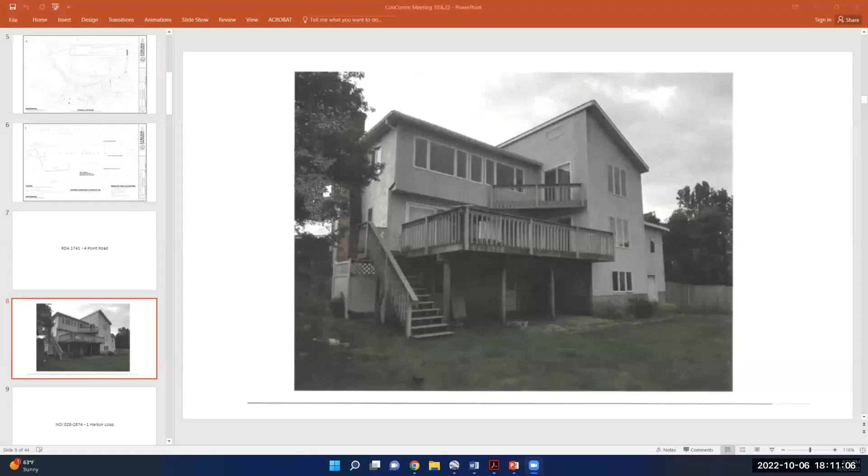There was an existing deck and we removed the railings and the decking, including the treads and the handrail, and replaced them all with maintenance-free Trex and Radiance rail system.

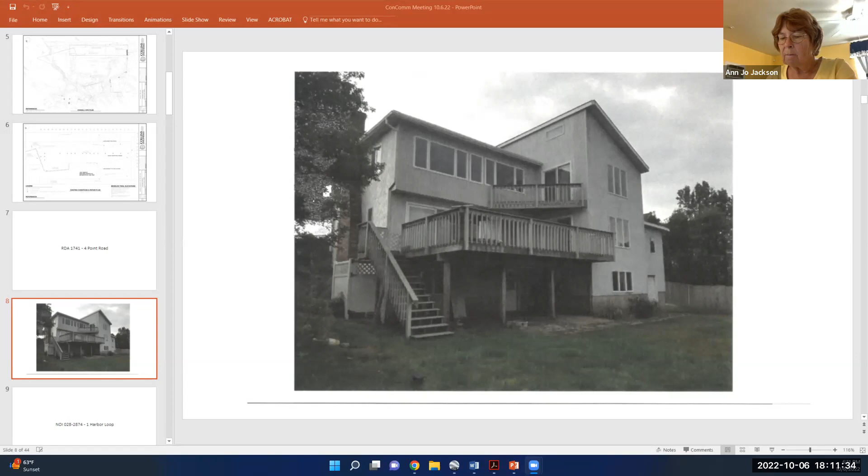Okay, and the resource area is what here? It's buffer zone and LSCSF. Okay, is this an after the fact application? It is. Okay, all right.

Chuck, have you been out to the site? I have not. I did not realize it was an after the fact application.

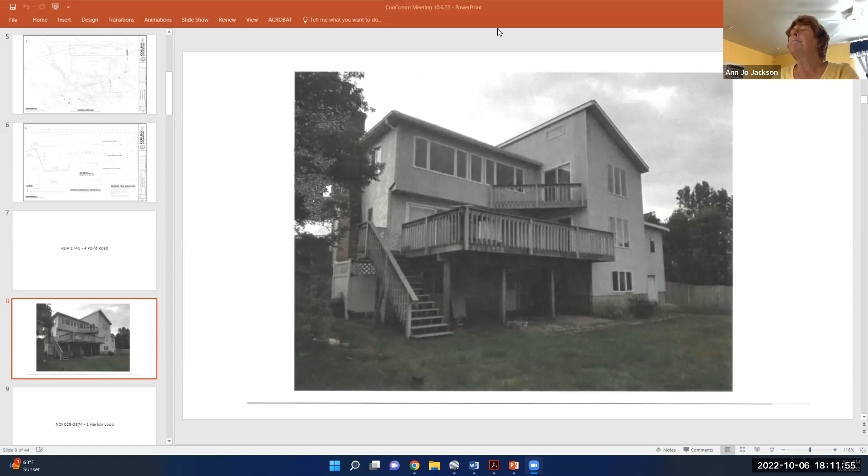Okay, all right, I'm going to open this up for public comment. Is there anyone in the public who wishes to comment on RDA 1741 at 4 Point Road? We have 17 attendees and I do not see any hands up. Okay, we'll close the public comment period.

Honestly, I would be more comfortable with this if somebody saw it, since it's after the fact. I think that'd be best if we did a postponement on this particular one. Yeah, well, don't we still have to do a

Commissioner comment, certificate of completion? Do we still have to do a certificate of completion on an RDA? No, we just have to find that it is or is not impacting the resource areas.

And the big question is, did anything expand in doing this? No, in fact the deck got a little bit smaller. And then we removed an upper deck, so it's non-existent now.

Is the deck pervious? Does it have space between the boards? Yes, just spacing. What we have there is spacing, but we have a gutter system incorporated underneath the deck that leads down into a dry well. That dry well was existing under the stair.

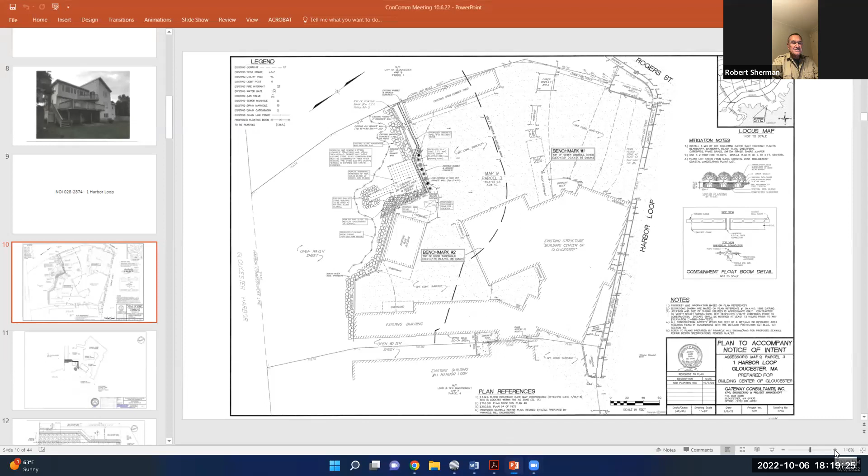My name is Michael Faherty. I live at 45 Rocky Neck Avenue. I'm an attorney, and in this instance substituting for John, representing my client, the Building Center.

In response to a suggestion made at a site visit attended by Mr. Gradwell, Mr. Sargent, and Mr. Shade, we've added some plantings along the inside section of the proposed wall, in an effort to do a bit more with the drainage, which we contend will be very insignificant because of the levelness of the project, but this will be an additional buffer and treatment of any runoff from the site.

I emphasize that the site is 8 feet above sea level up in the middle of the parking area, and then all the way down to the wall it's at 6 feet. So it's only a 2-foot change in elevation across the parking area and the area where the equipment and materials sold at the building center are stored.

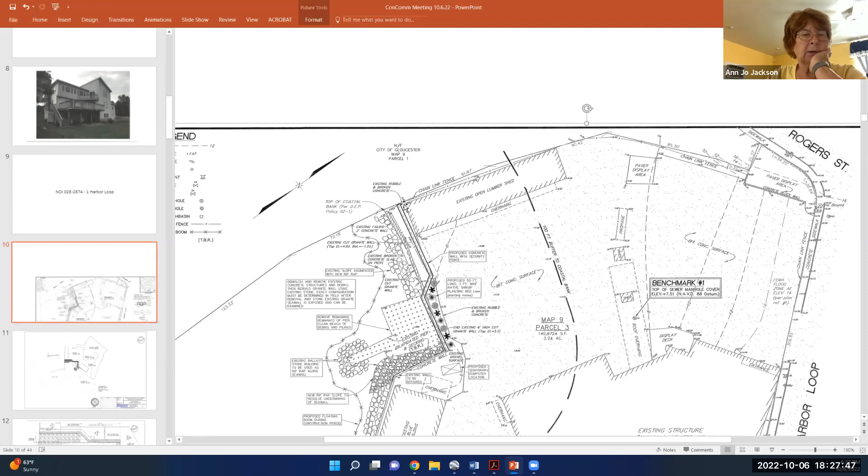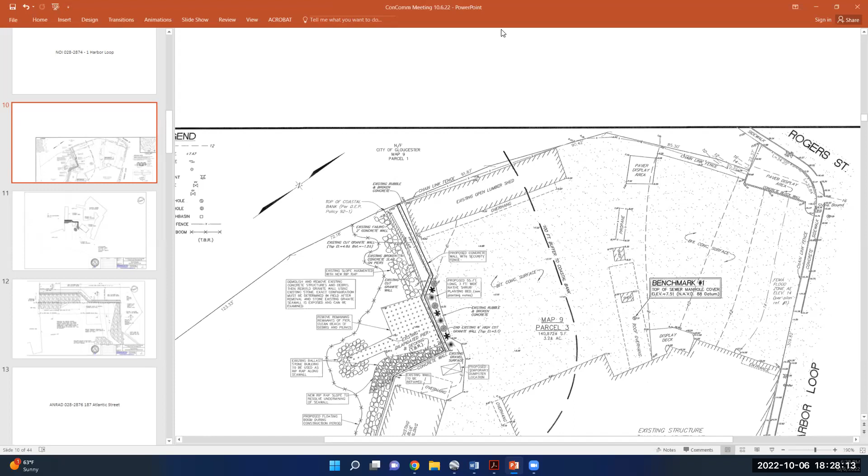There's a fence between the properties also, and the new wall would end at the fence. Okay, I have no further comments.

Chuck, do you have anything to add to your comments? And thank you for them. No, I mean, I guess it's replacing a previous wall, so that part seems to be nothing that causes concern. I guess it's just the additional height on that wall. There's concerns about how it might change things during a storm flow, but...

That would be the only question there - maybe that portion of the wall is not extended all the way to the end. But otherwise, I think the overall project is actually a net benefit for what's going on in that area, with the removal of the piles and cleaning up that rock. I think that'll help protect the bank there that's obviously eroded.

Okay, thank you. If there are no further questions, I think we're ready to close the public hearing. Barry Gradwell would like to close the public hearing on NOI 0282874, One Harbor Loop, Building Center of Gloucester.

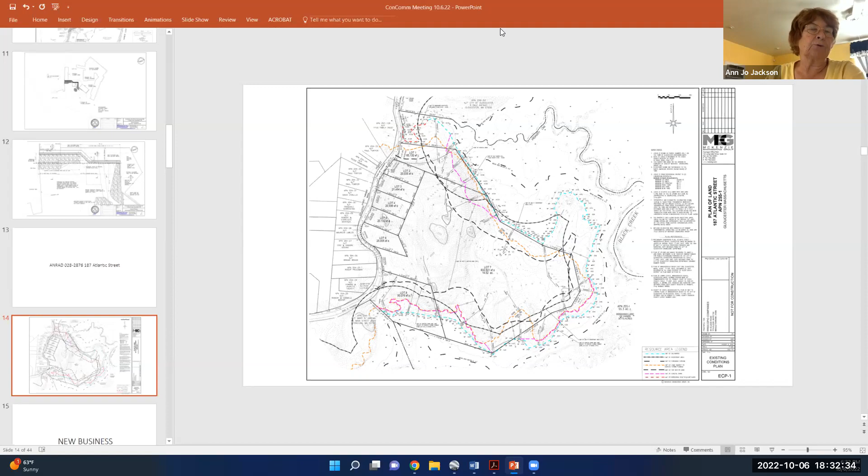Is there anybody in the audience who wishes to comment on the project at 187 Atlantic Street? We currently have 17 attendees. We've got a couple hands popping up. Robert Bishop is first here. Hi, my name is Robert Bishop.

I'm at 176 Atlantic Street in Gloucester. I just have a couple quick questions. On the map with the different dotted colored lines, where does that data actually come from? How did the applicant distinguish that? And then also, I would like to suggest to the committee and the applicant Procopio to maybe go out in this lovely, beautiful area at full moon, high tide, because that water comes in really high.

I'm across the street by about 500 feet, and the last harvest moon we had, I had beautiful waterfront property. So I just want to put that into consideration as well with the water concerns in the clam flats in this whole area. We've already approved the lot across the street, and I just want to make sure, moving forward, we protect everything around us, guys. Thank you very much. Certainly, thank you very much.

Do we have anyone else to comment prior to Ms. Rimmer answering the questions? Yes, I have John Myers here.

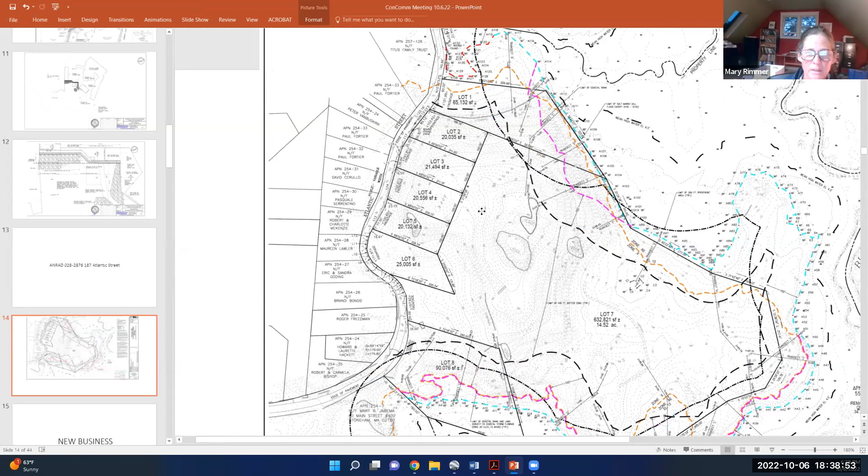Others are delineated by engineering and survey calculations, which would be the coastal bank line, reviewed by myself and the project engineer, Mackenzie Engineering. Hopefully that answers the question. We provide the materials in digital format to the Conservation Commission. I'm not sure about AutoCAD format, I'd have to check with the engineer. That's not typical, that the AutoCAD files are provided to the public.

This is not a required procedure. This is a voluntary procedure to go through this step to help guide the planning process, so that we're all in agreement with where the resource boundaries are for any future development.

Thank you very much. Well spoken.

Okay, let's open this up to commissioner comments. Member Cook, no comments. Member Gradwell, no comment. Member Sargent, no comment. Member Sherman, no comments. Member Jackson, no comments. Do you have any additional input on this, Chuck? You've been out to the site.

No, I walked the entire perimeter with Mary, and it was pretty straightforward in the majority of the property there. Very distinct vegetation changes along that stone wall that went along the entire perimeter, right at that salt marsh line. So I'm very comfortable with what I saw out there.

Okay, and we now have a DEP number, so we can act. Barry, if you would like to close the public hearing. Gradwell would like to close the public hearing on ANRAD 028-2878, 187 Atlantic Street. Commissioner Cook seconds.

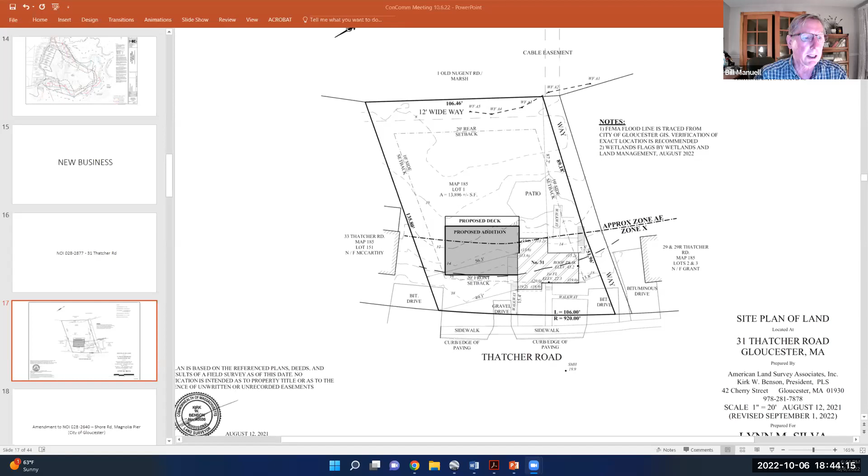And what I'm seeing here, Chuck, is this is not the plan I was expecting. I wonder if I gave you the incorrect plan to show. Let me see what else I have in the folder here. I could share, if you don't have the correct plan, I can share my screen and show you. Yeah, that's the only plan I have here. But what I might have done is incorrectly sent you electronically an earlier version of the plan, but the plans you have on file are the correct plans.

Okay, so if you'd like me to share my screen. Yep. There you go. Should be able to do it now.

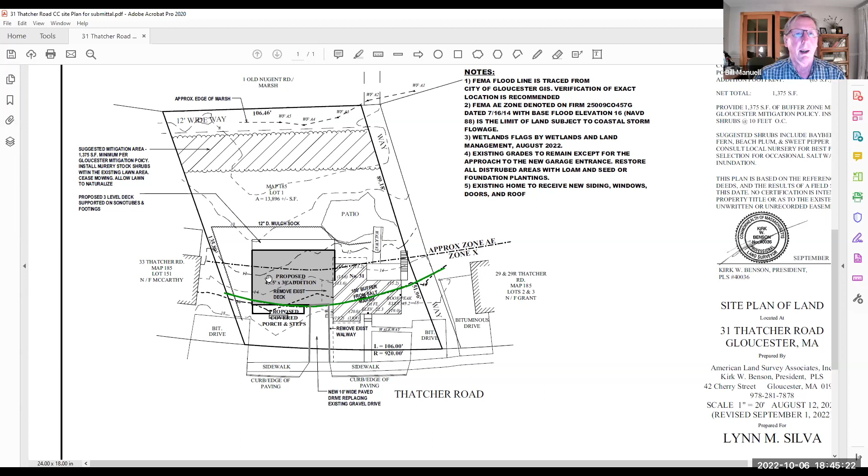All right, these are the paper plans that you have in your file. And so this shows the addition here and shows the area of mitigation right along the back. This is 1,375 square feet minimum. We have a chart of impervious coverage over here and our net total of impervious, and I have suggested shrubs and spacing for the mitigation area.

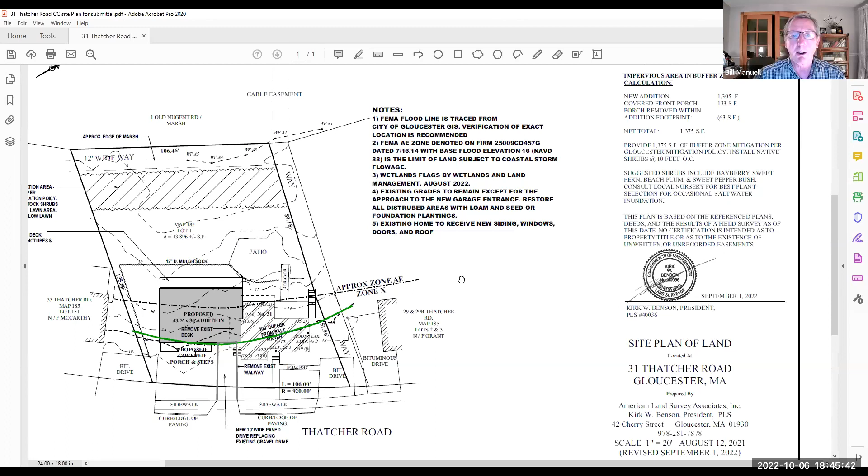And this is all consistent with your mitigation policy. We do show a mulch sock erosion control barrier to hem in the work. It's a fairly tight work site. It'll have a one-level deck on the back. It's a pervious feature, there'd be no roof on the deck, and no tree removals or anything like that. Everything, as I said, occurs within the existing grass area.

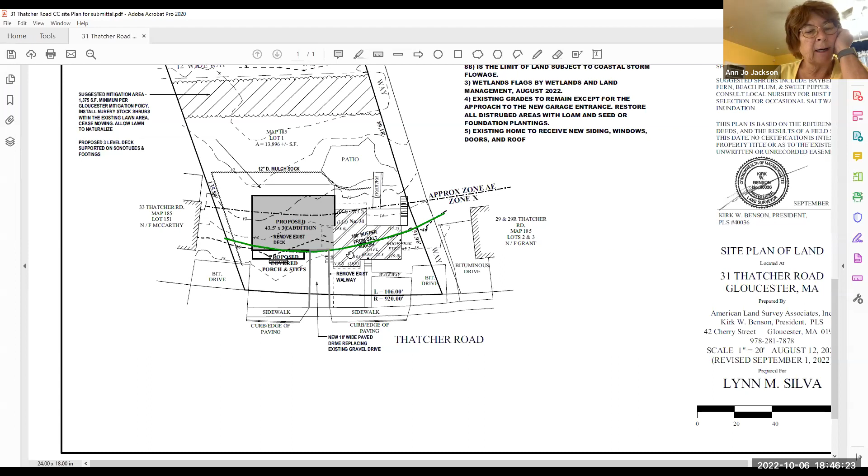Okay, thank you. Let's open this up for public comment. Is there anybody in the audience who wishes to comment on the project at 31 Thatcher Road? We have 13 attendees and I do not see any hands up at the moment. Okay, we'll close the public comment period.

Commissioner comments? Member Cook? Okay, is this on pilings? No, this will have a foundation with flood vent openings.

Okay, I think because we're starting to deal with the new regulations in regards to multifamily construction, this is a proposal that's more than the size of the existing house. So basically, we're building a new house attached to the old one. And I think in this case, it needs to be on pilings.

Member Gradwell? It's okay, that's right. It is an awfully large addition, but we have no restrictions on that. No further comment. Member Sargent?

I would have preferred a 2-to-1 mitigation for the increase in impervious surfaces. And I also note that it would have been easy to decrease the added impervious surfaces by not paving the driveways. And there should be a minimum of 2 years monitoring of the mortality of the mitigation plantings.

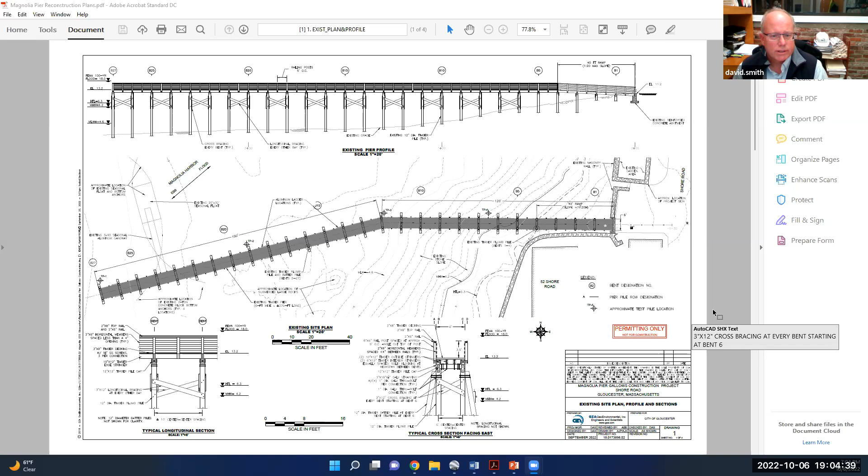So the proposed project here for this amendment would be to add a gallows frame—basically a frame that's two vertical plumb piles with a heavy duty beam that connects the tops of those piles.

And then we would have two batter piles on each side that would add some rigidity to this frame, both in the X and Y direction.

So there'd be 6 piles total installed, offset midway out from that pier. The gangway that we purchased as part of the pier reconstruction work is going to get repaired and reused. That's a 40-foot gangway, so we're going to install it about 20 feet offset from the pier.

The timber float that was on site had been there since 2016. It was never constructed properly for the particular site. It was a large float, 20 by 30. The harbor master suggested reducing that size, so we're going to go with a 12 by 24 foot float.

At the site it'll be a timber float. In addition to this gallows frame, we're going to improve the connections that the gangway has to the float, and replace the mooring chains that are currently out there. The moorings will stay in place and be adjusted properly along with that gangway-to-float connection.

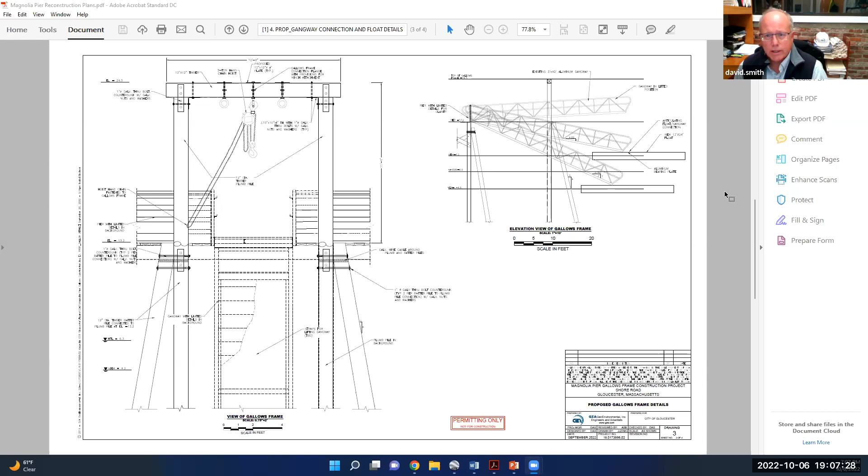So that's the project in a nutshell. Okay, thank you very much.

I'm going to open this up for public comment. Is there anyone in the audience who wishes to comment on the project at Magnolia Pier?

I don't know, do we do public comment on extensions? It's an amendment. Okay, sorry, I'm used to amendments appearing elsewhere on the agenda. Okay, we're all still learning.

There are 12 attendees and no hands up. Okay, so it's a moot point. We'll close the public comment period.

Okay, next up, commissioner comments. Member Cook, no comments. It looks like we may have a late public comment.

Somebody just put their hand up. Should we? Yeah, why not. I've started it, go ahead. Got Doug Rennie.

Thank you. Sorry, I couldn't be there other than on Zoom tonight. I'm actually an abutter, and I was trying to get online to see what this design was last night, but I couldn't find it anywhere. I looked pretty thoroughly. My name is Doug Rennie, and I'm at 52 Shore Road. I'm adjacent to the dock.

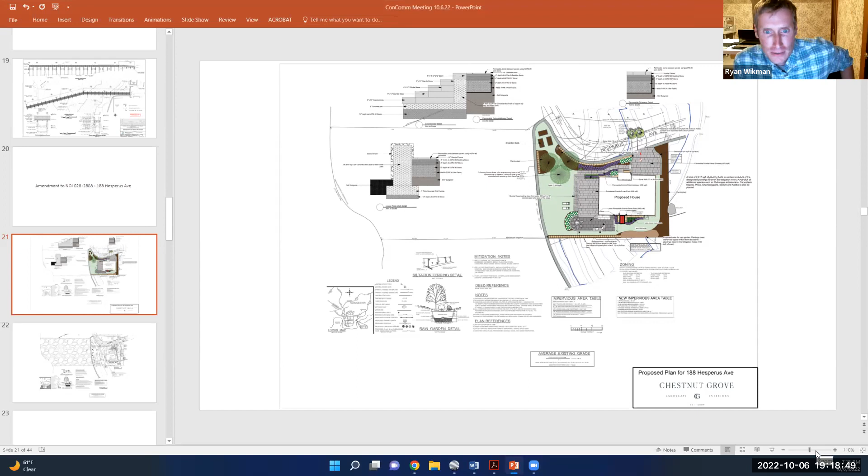Okay, let's have a summary of the plan. Yes, so we are proposing, this is a brand new build. Construction is already underway for the house, as you can see in this plan, for the proposed house there. We have developed a landscape plan for the project, and what we are proposing here is installing, I'll start on the top right.

We're proposing to install a pervious granite driveway, so it is a fully permeable driveway. I have details as well shown at the top side of the plan, showing what the pervious or permeable driveway would look like.

We also have, leading from there, walkways that lead to the front door and to the side of the house. Those walkways will also be a permeable surface. They are granite pavers, yet the joints are all permeable, so water is allowed to percolate directly through the joints. We create, as shown in the detail, three different layers of a gravel base, which allows us to drop the water directly down beneath those walkways instead of having the water run off.

So it is a 6-inch depth, and at the right side of that, there is an 8-inch wide by 24-inch tall concrete block wall, which the top step will sit on. But what it also does is help retain that patio, which is now between the proposed house and the stairs, keeping it in space.

But again, that whole patio is going to be a permeable surface where all the joints allow water to percolate directly down underneath, into the existing soil beneath. As we work further down, two more stairs lead us down to a lower patio space, again a permeable surface, as the details show throughout the drawing.

We do have proposed a 42-inch fire pit, a propane fire pit, on the left side of that lower patio. There's also a grilling station with a propane gas grill, a pizza oven, and a Kamado charcoal unit contained within that grilling station. Again, all of the hardscape surfaces we are proposing are permeable surfaces for what I've gone over so far.

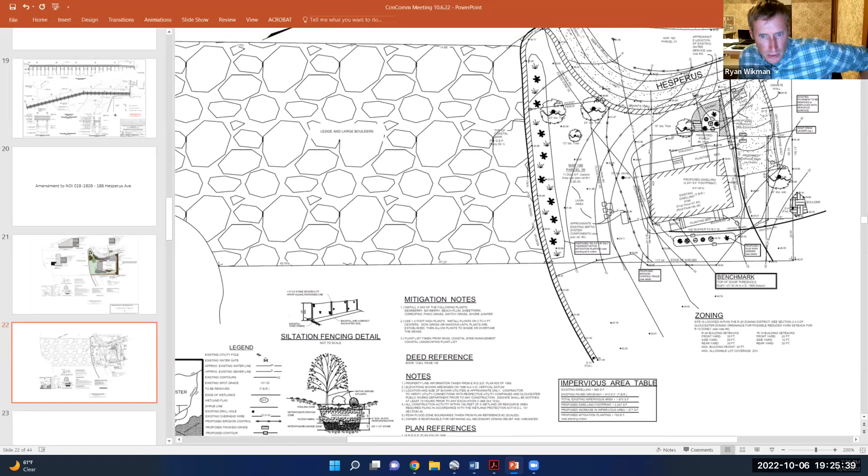What we're taking from the existing conditions plan and what the builder of the home had previously presented to the town - that plan called out the mitigation notes we see here. In the mitigation notes there's a whole plant list of plantings we're planning on using throughout the entire landscape. Our goal with the client was to make this property and its plantings go along with the beachside landscape. We're going to be using pretty much all of the plantings within the mitigation notes, and there are two pieces to that.

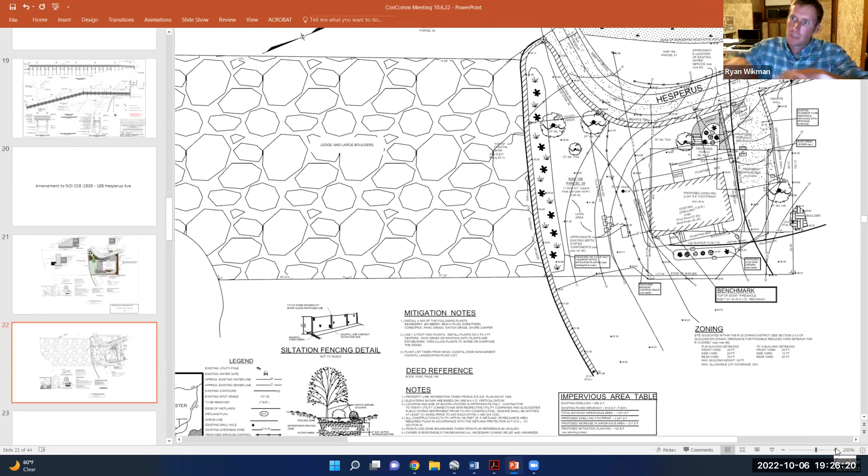There's a mitigation planting which in this plan shows right on the front side of the property, on the back side of the seawall - that's proposed at 750 square feet, I believe. And then on the bottom side, the rain garden that Chuck is showing is around 150 square feet. That also has mitigation plantings within it, but the rain garden is a bit of a depression there. Now if we go back to the other plan, what we're proposing gives much more planting space within the proposed landscape plan.

I'll start with the rain garden. I'm proposing to put that in slightly lower, in that light brown section. So putting the rain garden in that area creates a depression and allows water to percolate directly down. We have plantings that lead from there all the way to the seawall, and plantings that lead to the back corner and then all the way back up to Hesperus Ave as well.

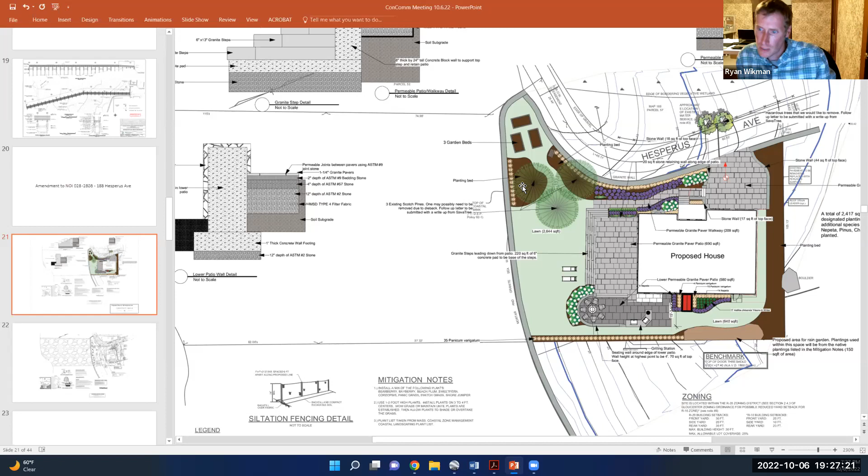There are a few other planting beds throughout the property, and what we're aiming to do is take the list of mitigation plantings and mix that all throughout our planting beds. What I'm showing you now is along the bottom side of the property there's switchgrass we're proposing planting along the whole length of that area - switchgrass is one of the plantings within the mitigation notes.

We're also proposing switchgrass up on the back side of the wall right on Hesperus Ave, and also some more switchgrass on the back side of the seawall behind one of the pines. And then throughout - I absolutely love this plant, the Arctostaphylos uva-ursi, I'm trying to remember the common name - bearberry, yeah. So that plant we'll be using as a ground cover throughout most of these plant beds. The sweet fern will also be used throughout a lot of these plant beds as well.

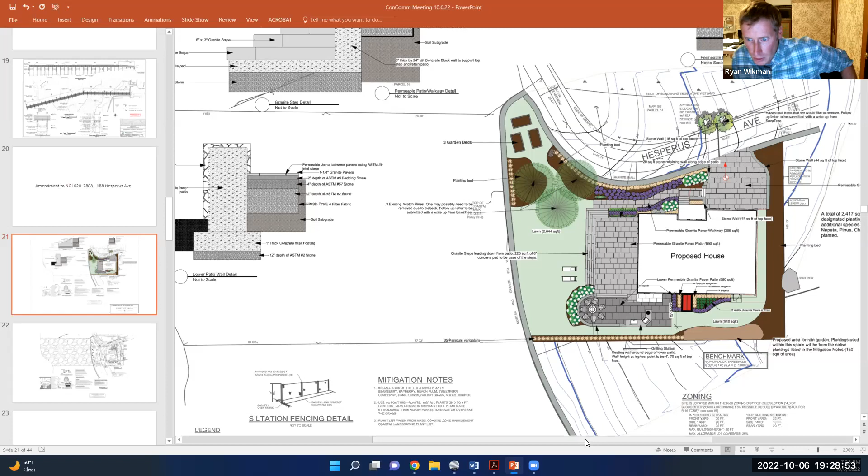And again, we have the panic grass, the switchgrass, which are both from the same family, but we'll be using basically one variety of switchgrass throughout the property. I have some notes here for a few other plantings that we're looking to add. You can see the planting bed space is 2,417 square feet.

What we're also looking to add, including what the mitigation notes state, is hydrangea arborescens, Nepeta, Pinus, Chamaecyparis, sedum, astilbe, and I know there's one other plant there, but let me move this so I can see what it is. Yeah, Caryopteris. So those are what we have right now that would be planted throughout all of these planting beds.

And I think I have covered most everything, so I'm going to pass it back to all of you for any questions or so forth.

Okay, since I opened up the last amendment for public comment, I feel compelled to do this as well. We don't usually have public comment on amendments, but I've set the precedent for this meeting. So we will go through any public comments, have you listen to all of them, and then respond to them if you would.

Chuck, is there anyone in the audience who wishes to comment on the project at 188 Hesperus Ave? We've got Judith Suda here. Name and address for the record, please. Looks like she may be muted.

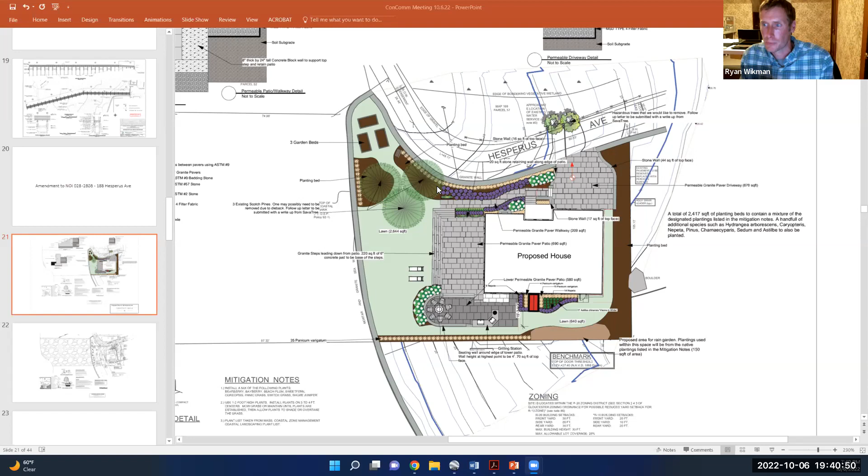What we're trying to get a better understanding from the arborist is whether they believe it's worth trying to save the tree, or whether in the long run it's going to be more of a hazard and should instead be removed. That's where we're headed in terms of the write-up coming, which we'll send to the Conservation Commission so you'll be able to see it. But at this meeting, I don't have that information, so I can't present all of that at this point.

We've closed the public comment period, since you've answered the questions and there's no one else ready to comment. It is closed then.

Next up, commissioner comments. Member Cook: I'm glad we brought up the trees because I was going to point out that we can't, as part of this NOI, approve or even show the removal of trees in someone else's yard. That can't even be part of this NOI because we just can't do it.

The second thing is, if these trees do pose a danger, we have a process where I believe they can just go to the agent with an emergency tree cutting form. The arborist just has to say it's a danger to the house, and it can be taken down with Chuck's signature.

The one challenge is once I meet with Judith - and I know Judith, you're muted at the moment - I'll meet with you and go over all this information. Once we have the write-up, I'll make sure you have a hard copy. Then we can meet on site and look through all the trees. In the end, it's basically up to Judith whether she'd allow us to do that. Then I guess we could move ahead with Chuck. But it will be in Judith's hands after I meet with her, and we'd take it from there.

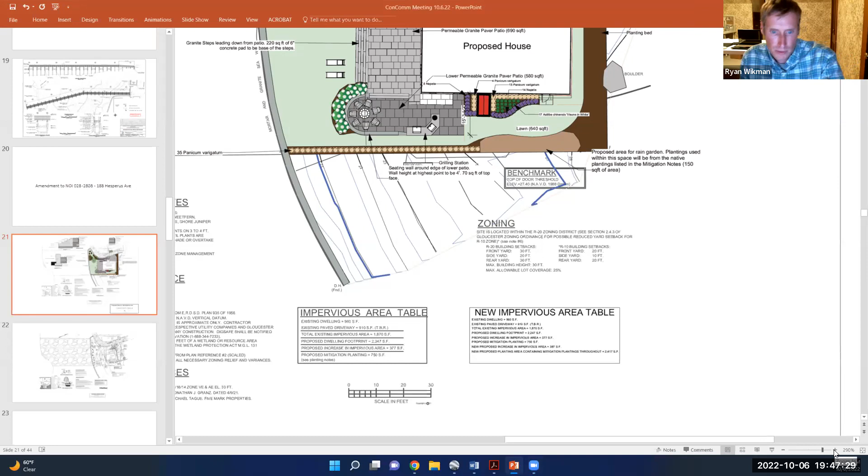That is on the second plan, the landscape plan that I submitted. There's a whole chart listing all of it - the new impervious table. On the left was the impervious area table that the builder had initially submitted, prior to us even being hired. They literally had no landscape plan for the project, so the client hired us to create one. The new impervious area table shows everything from the left side of the chart, but also shows the increase in impervious area, which is 380 square feet. But in the initial plan, the proposed mitigation planting square footage was 750 square feet. We will now be taking all of those mitigation plantings and putting them throughout a planting space which is 2,417 square feet.

Okay, I did see that. I wasn't sure at what point measurements were being taken.

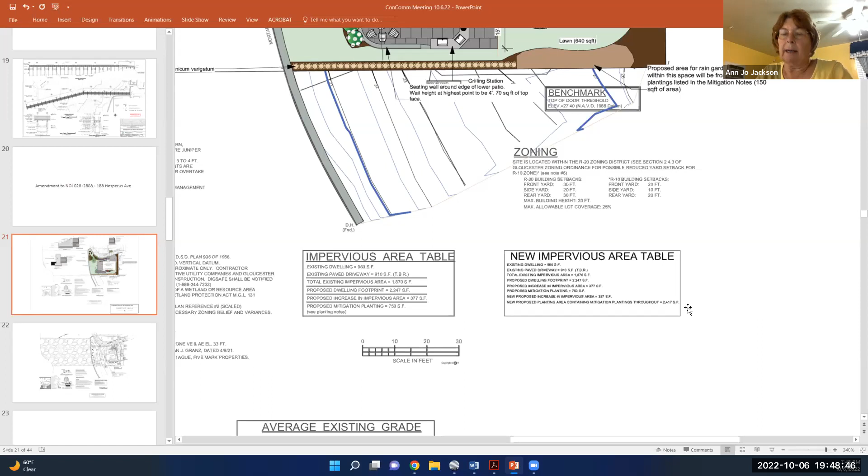Is anybody interested in a site visit? I'm in Arizona, so I can't do that right now. I'll be back next week, but I'm pretty fully scheduled. Is anybody else interested? Given the immense modifications to the original plan, I'm wondering if this warrants not just an amendment, but a new NOI.

I've wondered that too. Chuck, can we poll members and see what they think? Sure. Member Cook, you're muted.

I'm really not interested in a site visit per se, but I do think the impervious calculations are incorrect, because originally they were going to keep the paved driveway and now they're taking the paved driveway out. So there's another 600 or 700 square feet of impervious area.

That's becoming pervious, and it isn't even in the calculations that I can see. So Chuck, if you could pull up the existing conditions plan, it will show in that plan. If you can pull that up, I can show where it talks about the driveways, so I can address Mr. Cook's concerns.

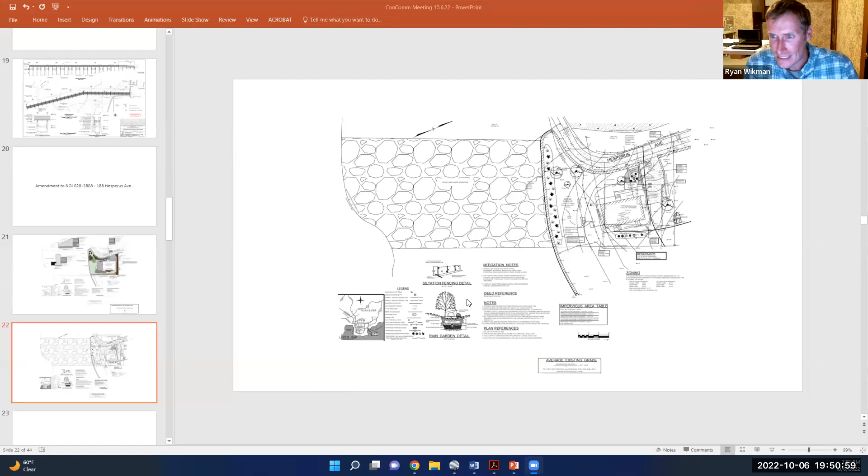Should I pull it up here or in the actual plan? The existing conditions plan, if you could pull that one up - it's just the black and white plan. Yep, that's what I have up here. Can everybody else see it? I can't see it. Oh sorry, I'm not showing my screen. Okay, now I can see it well.

Could you zoom in? Bring us back closer to the top right, near the driveway. So on the right side there, you'll see the existing pavement to be removed and replaced with a pervious surface - that's what was in the existing proposed plan, and we are also proposing a pervious driveway as well.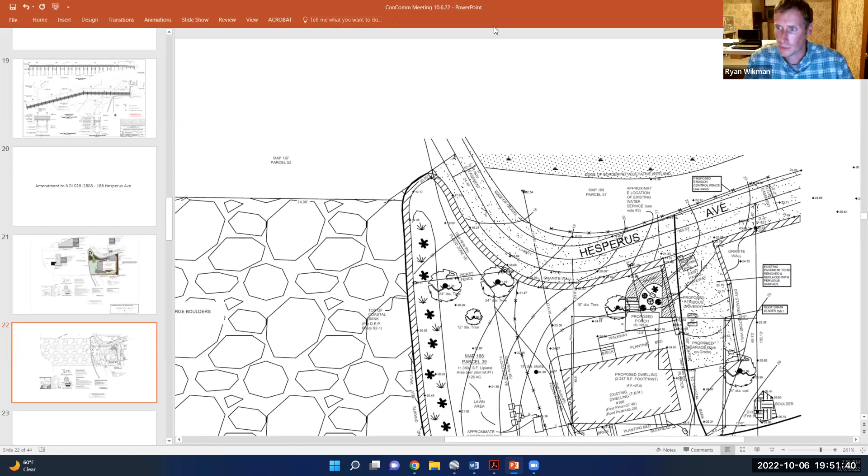So hopefully that helps answer some of your concerns, Mr. Cook. Yes, thank you. Okay, and we were in a roll call concerning amendment versus NOI.

Member Gradwell: I'm available at any time, I've been watching the construction. Okay, what about your feelings on amendment versus NOI?

Let me go out of order - since an amendment is part of an existing NOI, I think the only difference is conceptual, that we can condition this as we would an NOI. So while it's significant enough that we would often have a new NOI, there already is an NOI that we can add conditions to. Okay, go ahead, Barry.

If you want any kind of site visit, I'm available. I don't see any necessity why this shouldn't just be an amendment, not a new NOI. Okay.

Member Sargent: I think this stretches the envelope on an amendment, but I'm willing to consider it as an amendment. But there's much work to be done in looking at if trees have to be taken down, and if work's going to be done on the abutter's property, which I don't think can be done legally as part of an NOI. So it's not ready for prime time.

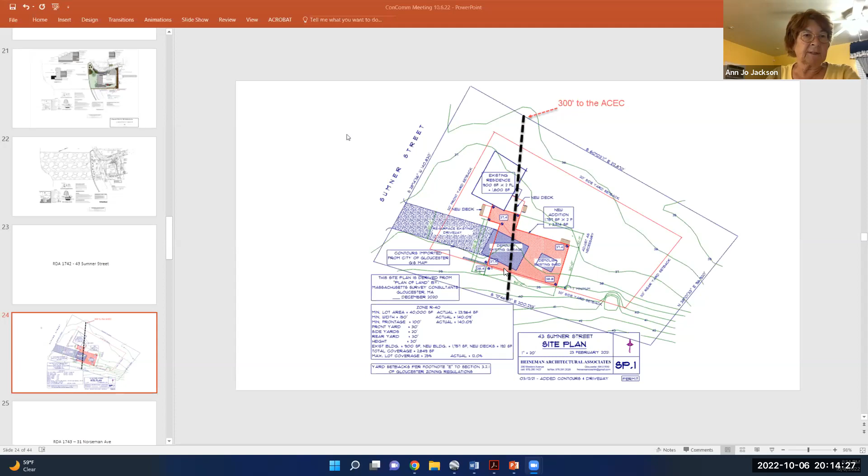And it would be nice if you had a little more specificity on what plants you were planting. If it's all dogwood, fine. If there are other plants that you would like to incorporate, would you be able to do that?

And would it be in a position to continue this to the next meeting for you to be able to give us those details? It would be, because we were supposed to start our project, and just a quick summary, the building department ignored us back in January. So this was a real shock that we have to do this now. So yes, this is putting us behind, and I was hoping that this would just be a one and done meeting, to be honest.

Well, we'll see how that works. I would also be willing to accept a condition that you submit a planting plan to the agent, with all of those calculations shown on it, and the types and numbers of the plants you're going to use, and where you're going to plant them.

Sure. Commissioners, does anyone else have any other comments? Do we want to go through again and see where we stand on this? Chuck, do a roll call, I guess. Member Cook? Yeah, just to see where we stand on this.

Okay, Member Cook? I still feel it should be an NOI. Okay, Member Gradwell?

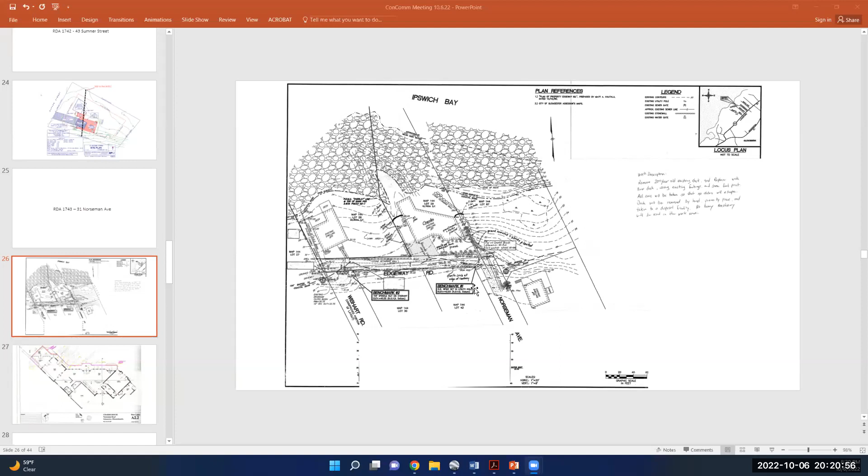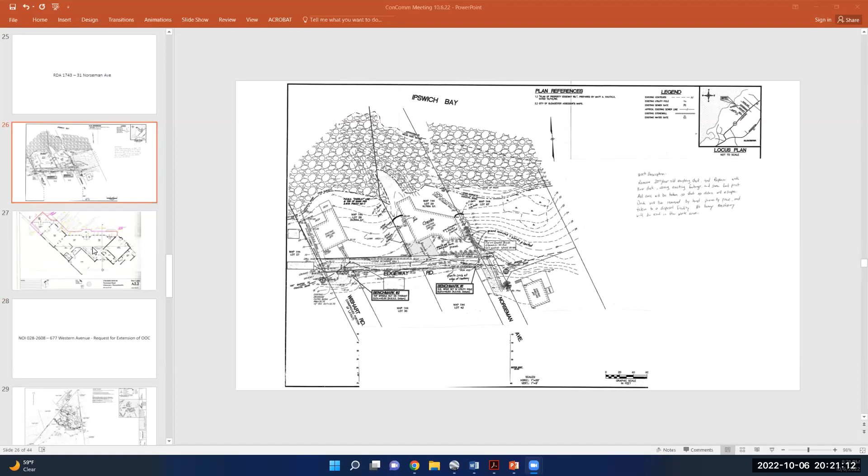What I'd like to do is remove a 20-year-old existing deck that's become weakened over time and replace it with a new deck using the same footprint, the same exact size. The deck is going to be taken apart by hand, there'll be no machinery used, and all the debris will be taken to a disposal facility. We are higher than the floodplain so it shouldn't be an issue with drainage. We're not digging and we're not going to disturb the ground, so it will be a very clean operation.

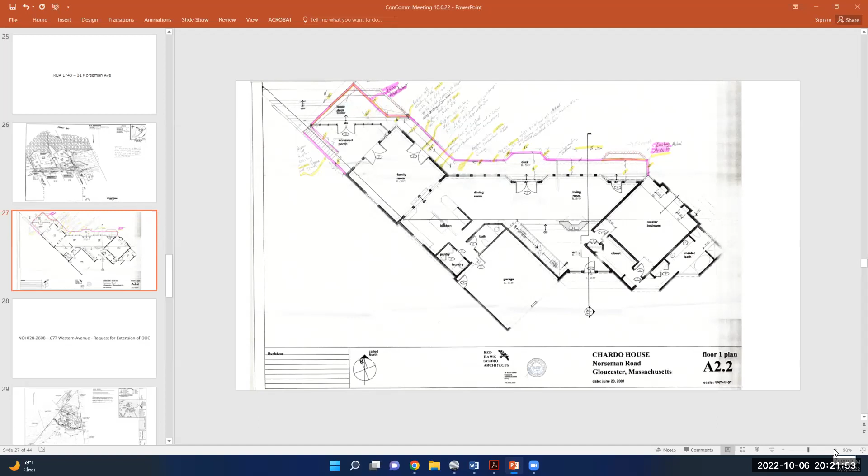I guess just to take off the existing deck, it's pervious. The original plan showed a screened porch at one end, but that screened porch was never built 20 years ago on the left-hand side - it's just an open deck, and we're going to keep it that way. Same footprint, same design.

Okay, thank you very much. We're going to open this up for public comment and see if anyone in the audience wishes to comment on the project at 31 Norseman Ave. Currently have 7 attendees and no hands are up. Okay, thank you, I will close the public comment period.

Commissioner comments. Member Cook, no comments. Member Gradwell: I thought that on the top left-hand corner, on what was supposed to be the screen porch, there was an expansion of the existing deck, and he did not address that.

Can you still hear me? Yes. No expansion - the existing deck goes out in that area. It's approximately 18 by 17, and that's the deck that was originally built and approved, and we've had it out there the whole time. I don't know why that plan shows a screen porch, but we never went through with that, although that might have been the approved plan in the beginning. But no, the deck is totally pervious.

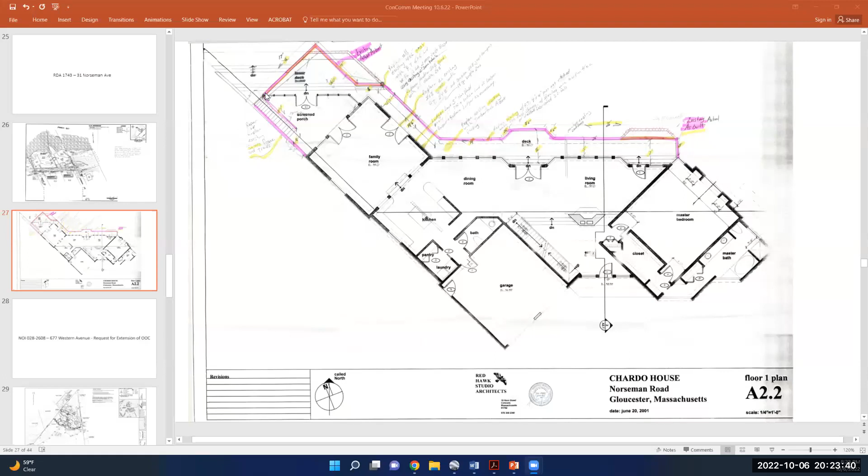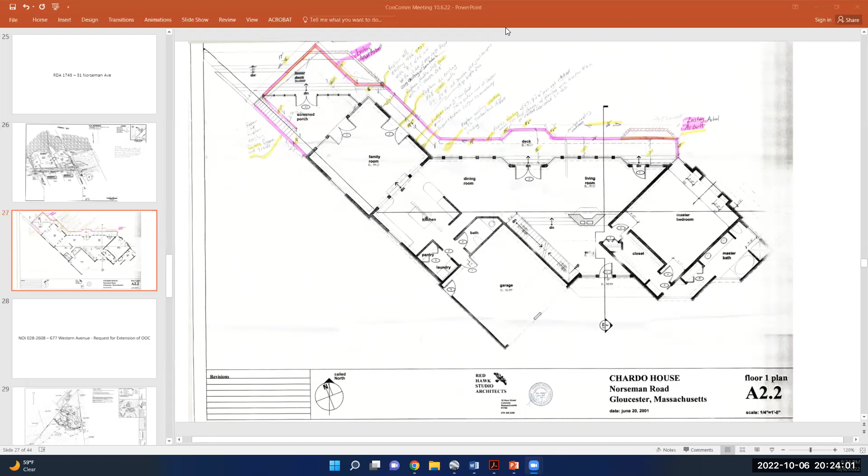The materials we used back then - we used hemlock to frame the deck, which was a natural material. Now they've got pressure treated materials that are more environmentally friendly, and they'll be stronger also. So that's what we really want to achieve - safety and a good, strong deck that'll last.

Member Sargent, no comment. Member Sherman, no comment. Member Jackson: I have no comment, I have no problem with this. Okay, then I will entertain a motion to close the public hearing.

Motion to close the public hearing, RDA 1743, 31 Norseman Ave. Commissioner Cook seconds. Roll call: Member Cook, yes. Member Gradwell, yes. Member Sargent, yes. Member Sherman, yes. Member Jackson, yes.

Negative RDA on 1743, 31 Norseman Avenue. Commissioner Cook seconds. Roll call: Member Cook, yes. Member Gradwell, yes. Member Sargent, yes. Member Sherman, yes. Member Jackson, yes. Now you're all set, Mr. Chardo. Thank you, everyone, I appreciate it.

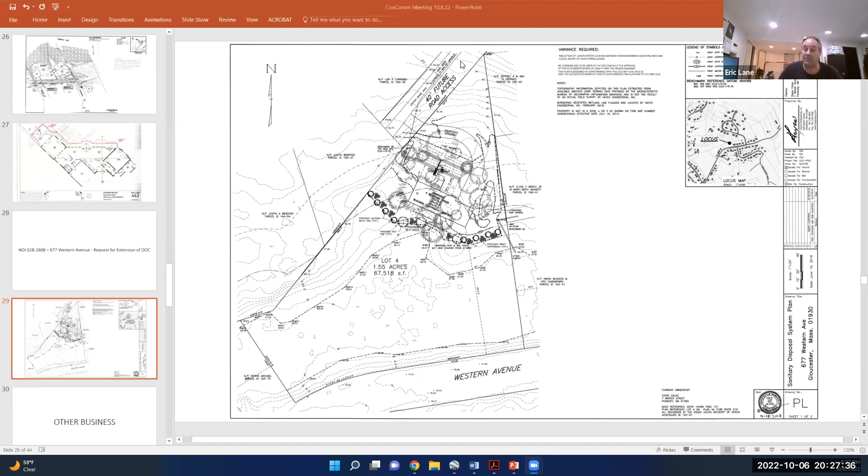Let's open this up for public comment. Is there anyone in the audience who wishes to comment on the project at 677 Western Ave?

Got two hands up. Amy Graves is first.

Hi, can you hear me? Yes, we can. Great. Hi, I'm Amy Greaves. I'm at 12 Lawndale Circle. I'm an abutter to the property. I'm also the president of the Magnolia Heights HOA, which is the subdivision that abuts this property.

This property in question also holds an easement to the development drainage. I wasn't around when the order of conditions was initially approved back in 2018. Well, I lived here, but I didn't really know all about it and I wasn't involved. So I guess I have a couple of comments and questions.

One is I'm unaware of the activity that's been happening to obtain permits to access from Lawndale Circle, because we have a protective covenant and there's a number of issues at hand, but we haven't been alerted to any particular activity with planning. So I would be curious to see what they have done to take measurements, what they've done to progress the project. Also, we do have drainage on that property that does impact conservation, so I want to make sure we're all aware of the past.

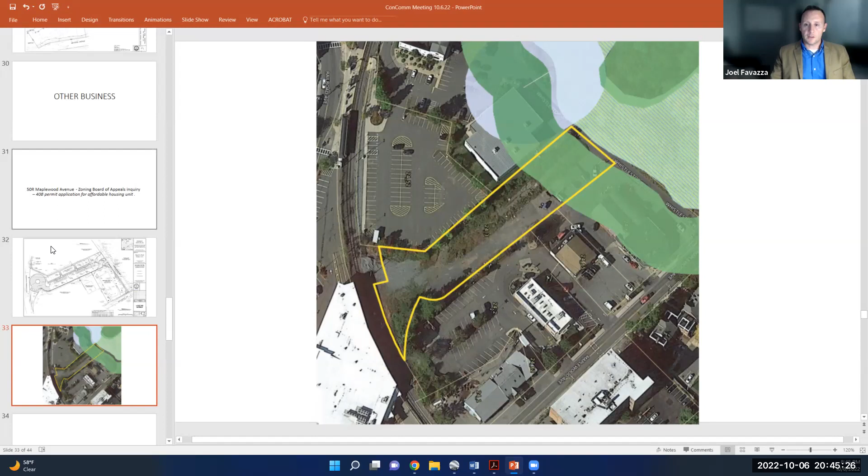So we'll see the wetland buffer here. Yeah, the wetland itself is actually on the other side of Whistle Stop Way. And then the green shading area is part of the 100-foot buffer zone to that wetland. So it's separated as it is by a paved roadway, but certainly we'll still give it due course and fair treatment and make sure we have all the details for you when we come back in. Okay.

That was the only question I had. Okay, Member Sherman, no comments. Member Jackson. Oh, I'm sorry, Member Sargent, skipping people here.

To answer Bill's question, a portion of this property is within the buffer zone to a wetland sometimes called the Emerald Forest, located between Myrtle Square and Whistle Stop Way. This jurisdictional wetland, as well as the wetland behind Cleveland Place and Sargent Street, are all that remain of what once was a 1,500-acre Great Harbor swamp. Based on an initial review, it appears that the wetland buffer zone on the plan is smaller than the buffer zone depicted on the City of Gloucester GIS wetland maps. Currently there's vegetation on site. Loss of vegetation and increased impervious surfaces exacerbate flooding that frequently occurs on this and adjacent properties.

This proposal should come before the permit. Were you done, Dave? Yes. Okay. Member Gradwell.

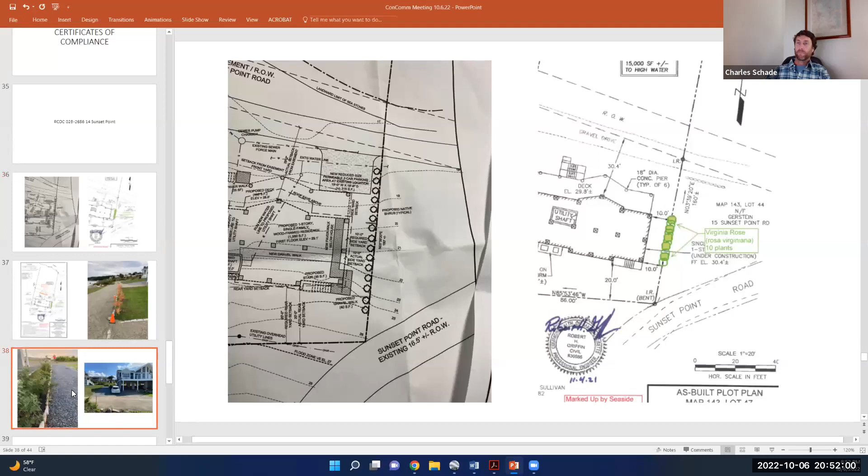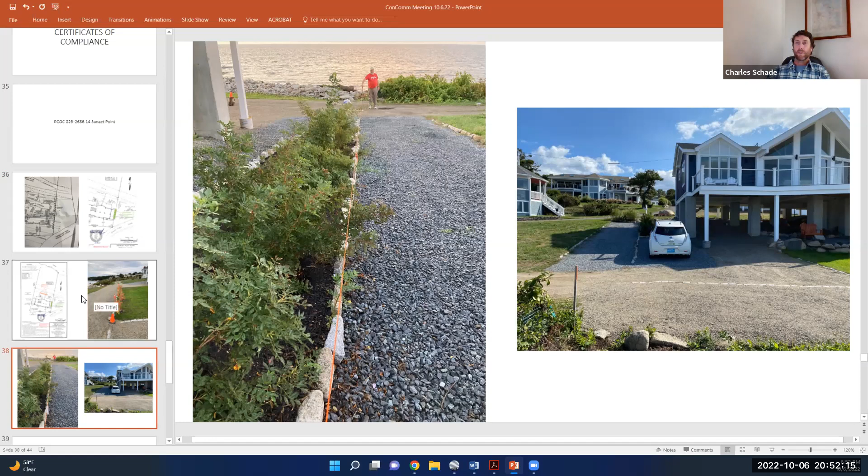We also had the question about the additional drive area, and there was evidence that it was the adjacent landowner, and that's their driveway on their property, not this owner encroaching. So everything that we had questions about, I believe has been addressed.

These were put down on the down gradient side of the property, as Member Sargent had requested. So everything looked taken care of to me. Okay, thank you very much.

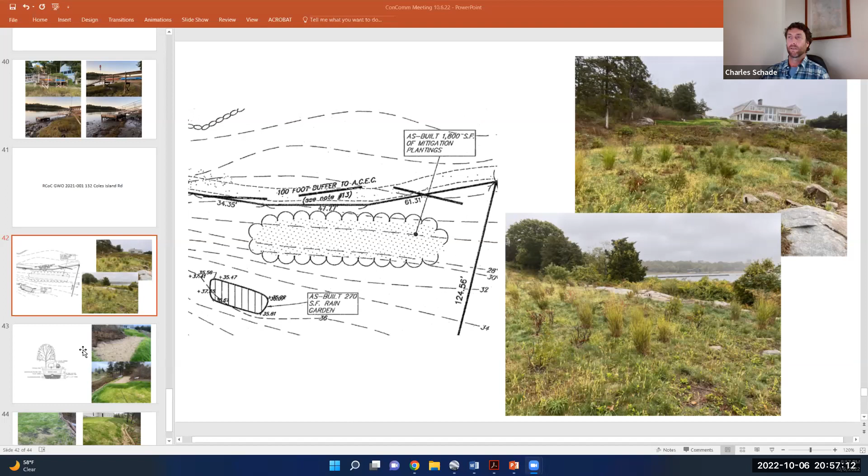Everything's coming in pretty well. There was no real major issues of any erosion, just a little bit where this wattle seems to have gotten dislodged. It was more a sense that the grass is very young. I could feel it moving a little as I was walking on it, so it didn't give me the sense it's really rooted in to be considered truly stable, especially given some of these steeper slopes. You could really still see the jute netting underneath there.

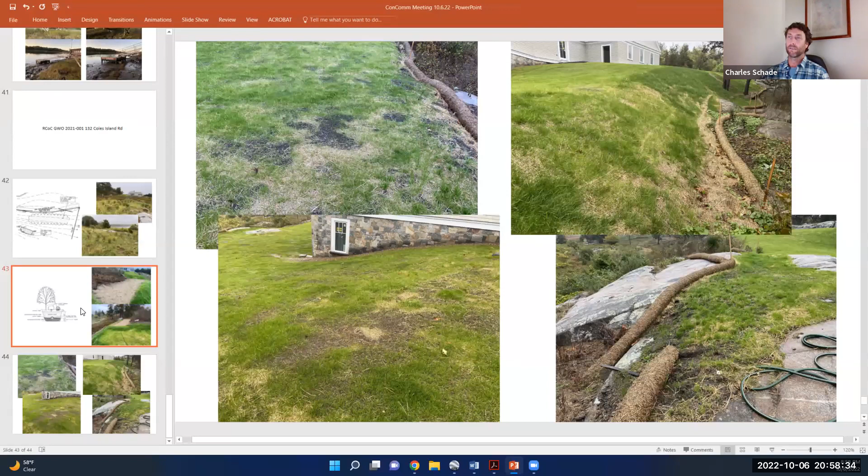Given that, I just wasn't sure we could fully sign off on it yet, given the rain garden and the still fairly young grass. I'd be hesitant to have any erosion control removed at this point, the way that grass felt.

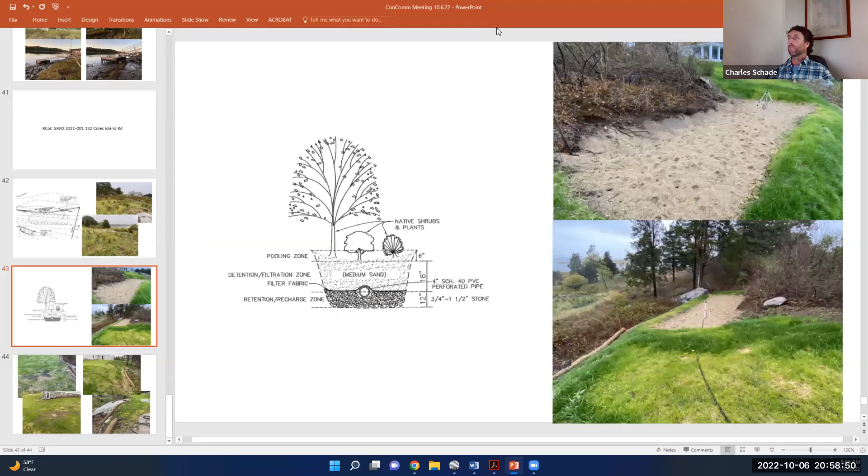Have you communicated this to the applicant? I have not. I was just out there yesterday in the rain, so I thought John or somebody was going to be representing tonight.

Yeah, but geez, Chuck, that last picture you showed - if I didn't know any better, I'd swear they had sprinklers run out in that lawn. Yes, there was a sprinkler out there. And when was that taken? Yesterday. There's the hose, the previous one here.

I'm only saying it because we've got a lot of them where we require people to have 2-year growth, and this year, unless they kept their water running against the rules, they'd probably get killed. I know I've got a lot of stuff that's been dying, including my lawns, so I don't know how we're going to handle that going forward on some of this.

I did have a question from somebody in the mayor's office asking specifically about that. I believe in their next round of information to the public on water usage, it was going to allow for watering of plantings required by the Conservation Commission for mitigation planting, so there was going to be an allowance for that type of planting to be watered still.